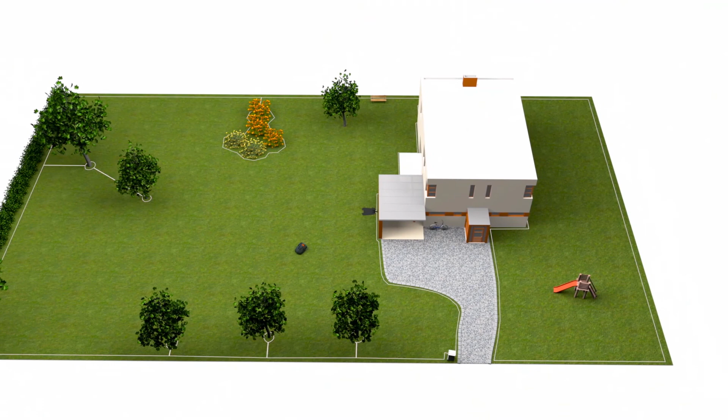Husqvarna Automower works inside an electronic fence created by a loop signal sent from the charging station through the boundary wire. When Automower passes the wire, it detects the signal, stops, turns, and continues in another direction.

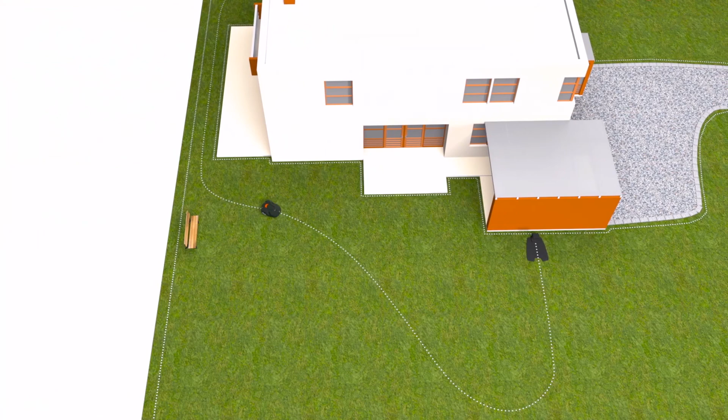Husqvarna Automower works fully automatically. When batteries run low, it has several ways that will ensure it always returns to the charging station. It can follow a radio signal sent from the charging station. It can follow one or several guide wires. And it can also follow the boundary wire back to the charging station. When the battery is fully charged, it returns to work without your intervention.

A robotic mower requires time for installation. However, this is a one-time effort that will give you a more or less maintenance-free lawn for many years. The installation is easy enough to be managed by yourself, but the most convenient way is to let your dealer do the job. They can use a cost-effective cable layer that places the wire a few inches underground and have experience in all kinds of challenges.

Husqvarna Automower works in a free movement pattern. This will let the mower find every challenging corner of the yard. After installing the product, it generally takes a few days of continuous mowing before the lawn looks even.

The robotic mower will now continue to work and constantly cut the grass as it grows, but just a few fractions of an inch at a time. This is by far the most gentle way to cut grass. This concept can even keep moss away.

The clippings from Husqvarna Automower are only fractions of an inch long. They will fall to the soil, decompose, and serve as natural nutrition for your lawn. Since Husqvarna Automower works with razor-sharp cutting blades, the lawn is cut with a fine edge, which also improves the grass quality.

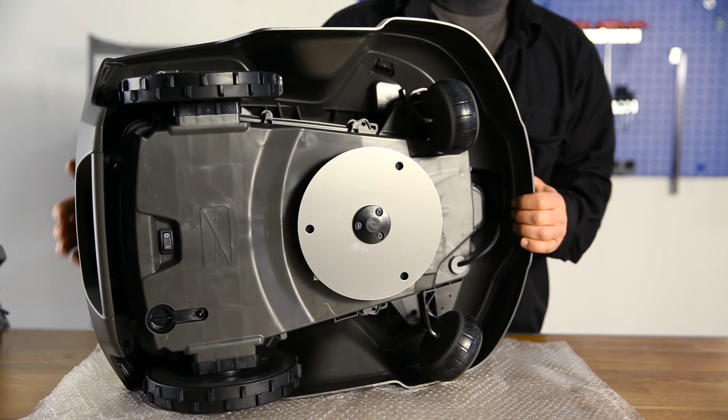There are several differences between the models in the Automower range, but the overall concept is the same. It consists of a 3- or 4-wheel chassis and a body cover. In the rear, there is an integrated handle.

The cutting disc has 3 free-swinging razor-sharp blades. To save energy and protect the cutting blades, there is a skid plate between the grass and the cutting disc.

In the back is the main switch. The mower has a large stop button that also opens the hatch. Under the hatch, you will find a display and keypad for all menu settings.

The method of setting the cutting height can vary between models: manually by turning a knob on some, electrically on some.

There is a charging connector. When the robotic mower docks to a charging station, it starts to recharge.

The charging station has a platform for the mower and a charging tower. The connectors are placed on the rear side of the charging station: left and right for the boundary wire, and connectors for guide wires depending on model. There is also the power supply connector.

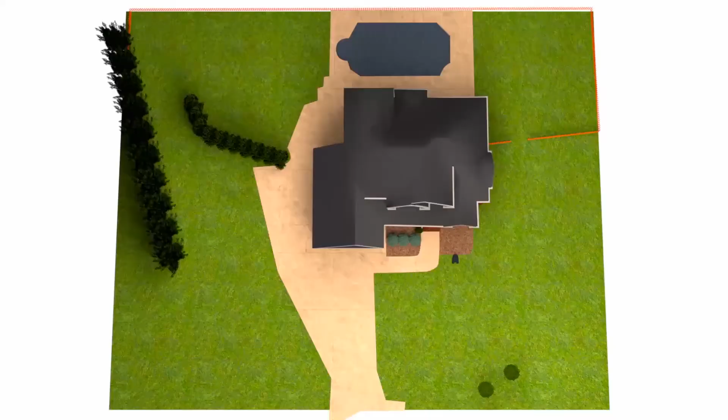Start by making a simple sketch of your yard to get an overview. This will help you plan your boundary and guide wire placement, and placement of the charging station. Some yards need more planning than others. When you have watched this film, you will know the methods to handle the most common objects in your yard.

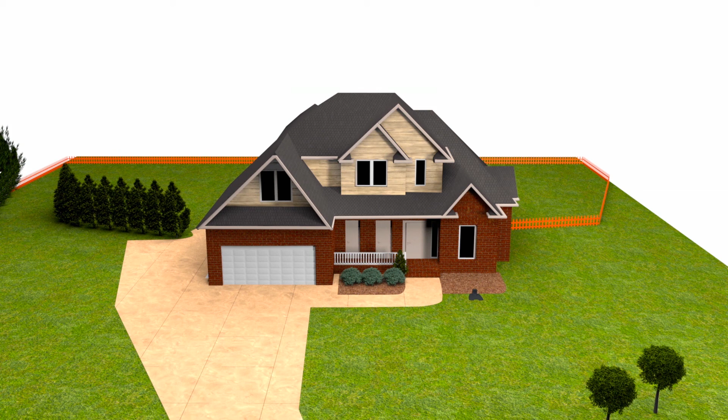Start by placing out the charging station. Recommended placing is on the main area, on an even and preferably shady spot, not far from a power outlet. Find a level spot to make the docking easier for the mower. Plan for 6 feet of free space in front of the charging station.

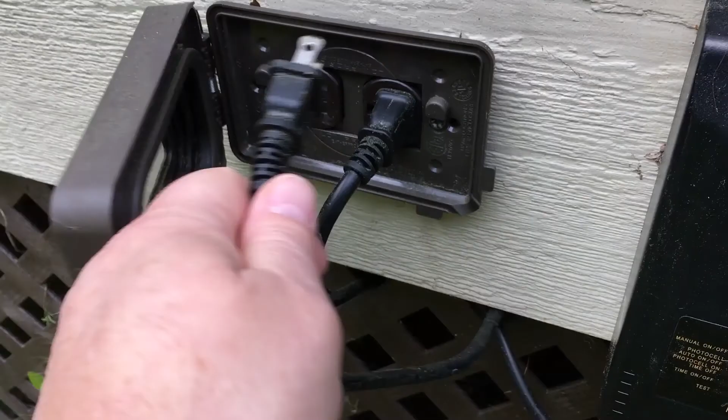Place it on the ground, but do not secure it firmly yet. Find a weather-protected place for the power supply unit. Plug the power supply into the outlet. Connect the low-voltage cable to the charging station.

Switch the mower on and place the mower in the charging station. It will now start to charge and be ready when you finish the installation.

The boundary wire defines the mowing area for the robotic lawnmower. The principle is that the charging station sends a signal through the wire. The mower has a sensor that detects the signal. If it runs over the cable, it stops, turns, and continues in another direction.

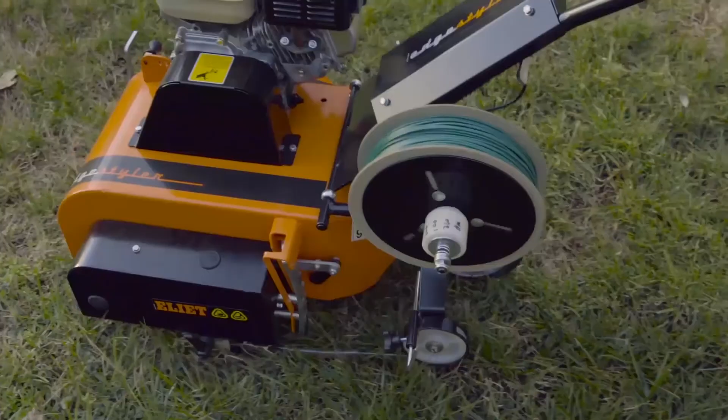If a dealer does the installation, he will probably use a cable layer that places the cable a few inches underground. It is fast and efficient. In this film, we will show the manual way by using a hammer and plastic staples and placing the wire on the lawn. After a few weeks, it will be totally overgrown and not visible.

Regardless, a machine or staples, the distances and principle of laying the wire is identical.

Start by securing one end of the wire at the station. Leave 2 feet of extra wire.

As the robotic lawnmower always passes the wire a few inches before it stops, the wire must be laid at different distances from obstacles. Here the ruler comes in handy. It has 3 printed distances: a short, a mid, and a longer. Exact distances vary a bit between models.

In front of hard objects, like fences and walls, you should use the longest distance. Otherwise, the mower will collide with the hard object at every turn.

When it comes to flower beds and softer bushes, where there is no risk of collision, the mid-distance is sufficient. If the distance is smaller, the mower may drive over the edge and get stuck. If it's longer, the mower will leave uncut grass close to the edge.

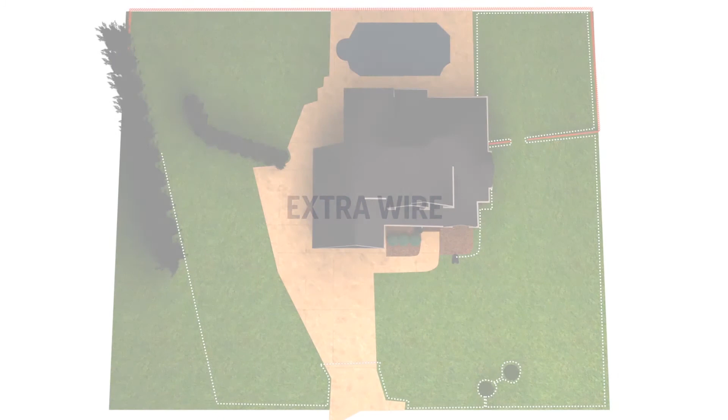Again, our recommendation is to create a sketch of your yard before you start. The guide wire later needs to be connected with the boundary wire. If you have pre-planned this spot, you can leave a 4-inch loop at this location and it will be much easier to do the connection.

When you finish the boundary wire and return to the charging station, leave 2 feet extra wire and cut.

So now you know the basics of how to place the boundary wire. Maybe you will run into obstacles you don't know how to handle, like fenced areas, narrow passages, etc. This will be handled in the chapter Advanced Installation.

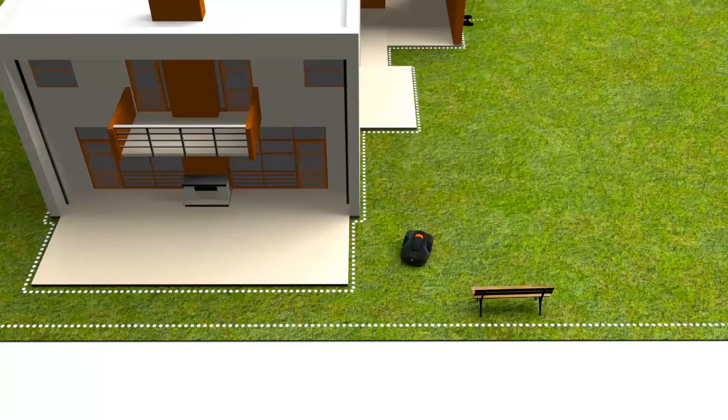But first, you must learn about the guide wire. The guide wire opens a lot of possibilities. It will help the mower find its way to different and more challenging parts of your lawn and return effortlessly to the charging station. Automower does not require a guide wire, as they also can find the station with a radio signal and follow the boundary wire.

But we recommend installing it anyway, as the mower will find the charging station faster. The installation method varies slightly between models. In general, the cable should start from the rear of the charging station, leaving 2 feet of extra wire, placed centered under the base plate.

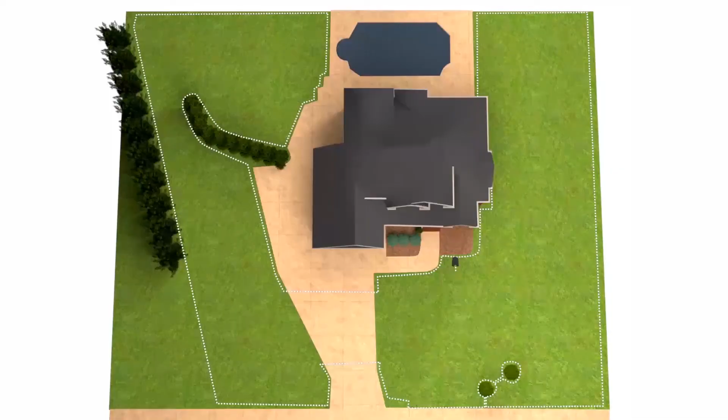In front of the charging station, lay the wire at least 5 feet in a straight line. Use the staples and continue with the wire until you reach the planned spot for connection to the boundary wire.

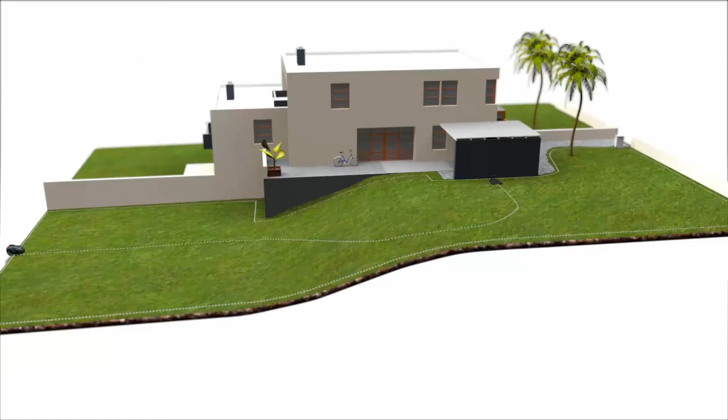In an open yard, lay the guide wire beginning at the charging station and run it to a central point on the opposite side. If you lay the guide wire on a slope, lay the wire diagonally so that the mower will have optimal traction.

If you plan for the connection spot when you place the boundary wire, you'll have extra wire to connect the guide wire with the boundary wire. If not, you may need to extend the wire with another coupler.

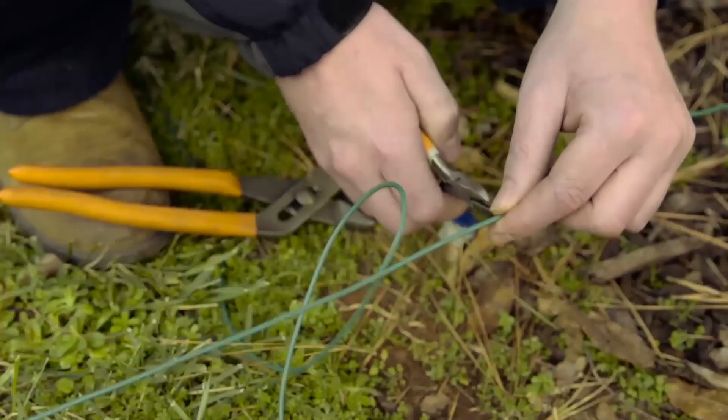Cut the wires. Use a coupler, it has 3 holes. It doesn't matter in which hole you put the wires. Be sure all 3 wires are pushed into the bottom of the coupler. Then squeeze the coupler with pliers.

The plug is filled with grease that makes it weatherproof. Secure everything in the lawn. When connecting the wires like here, or repairing a damaged wire, always use a weatherproof coupler. Just twisting the wires will not withstand corrosion and will lead to hard-to-find faults over time.

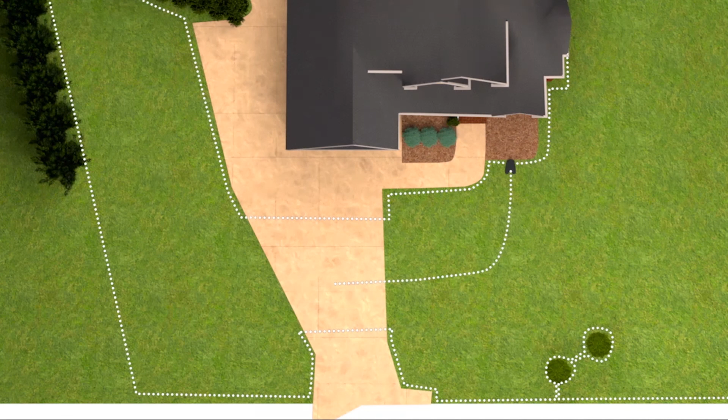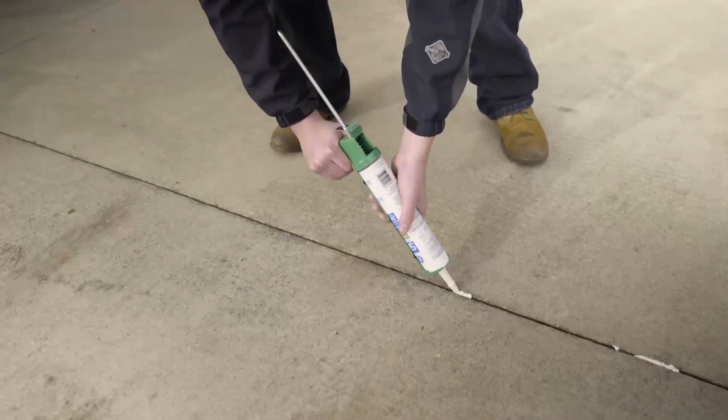If your yard is divided by a paved driveway, you can just let your mower pass by it. If the driveway contains expansion joints, just place the cable there. If not, you can make a thin slit with a grinder intended for the surface you have. Secure the wire with silicone or similar.

In general, we never recommend letting the mower drive on gravel. The risk is high that the mower will get stuck, so a paved passage is recommended instead.

If you have a yard with a remote section, it's a good idea to connect the guide wire here to help the mower find the area and ensure a faster way back to the charging station. If the passage is smaller than 6.5 feet, we strongly recommend doing this. In the passage, the minimum distance between the boundary wires is 2 feet.

As the mower tries to avoid creating tracks in the lawn, it follows the guide wire at various distances. The mower always drives to the left of the guide wire towards the charging station. Therefore, the guide wire should be placed closer to the right boundary wire, seen from this view.

If you have several remote areas, there are Husqvarna Automower models with several guide wires. In this case, there are 2 remote areas: one that can be reached through the passage we just described, and one area behind a fence.

If possible, an option is to make a small hole for the mower in the fence. Lay the boundary wire through the hole and fence off the area in the same way as the main area. Make sure you don't cross the wire.

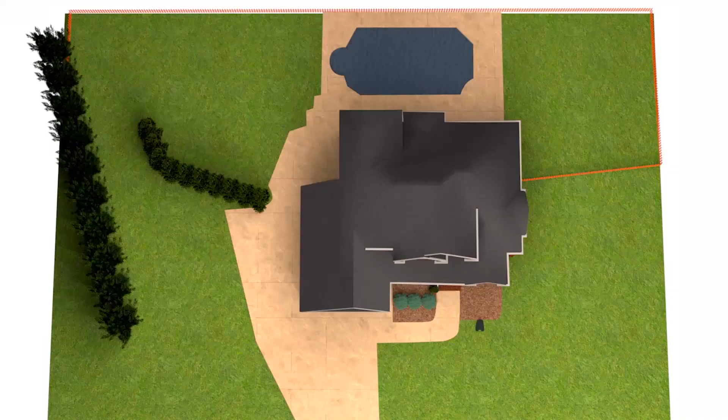If an opening in the fence is not an option, you can carry the lightweight mower back and forth. When placing the boundary wire, choose a suitable spot from the main to the secondary area and fence it in the same way as the main area. Make sure you do not cross the wire.

In this case, you won't need a second guide wire. When you'd like to mow the secondary area, make sure the mower is fully charged and carry it to the area. Press the Start button and select the secondary area option. Otherwise, when the battery runs low, it will start searching for the charging station instead of mowing.

When the battery is empty and the mower stops, bring the mower back to the charging station. Remember to switch back to the main area option when you want the main area mode.

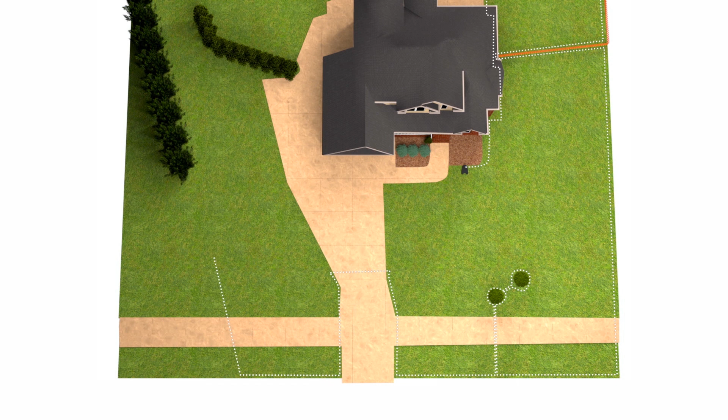If you have sidewalks like this, you can make thin slits and incorporate the sidewalks into the main yard. If it is large enough, you can treat it as a remote area and make a passage with a guide wire. Or make it a secondary area and carry the mower manually.

Now we are almost done with the installation. You just need to connect the wires.

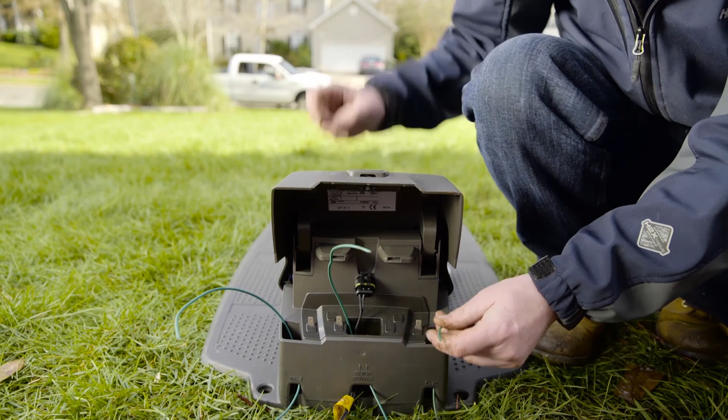Route the cables through the openings. Take a measurement at the contacts on the charging station. Cut off any surplus wire. Stick the wire into the plug.

This is important when connecting: the boundary wire coming from the left-hand side must be connected to the left connection, and vice versa. Finally, connect the guide wires.

Place the charging station on the ground and secure it with the supplied ground screws. Make sure no wires can get in contact with the mower. If installation has been done correctly, the LED light in the charging station will glow steady and the mower can start its work.

Before starting your Husqvarna Automower, remove all foreign objects from the lawn. Open the hatch and follow the startup wizard. If you prefer, you can just let your mower work with the standard factory settings. But we recommend that you make your personal settings according to the circumstances of your yard.

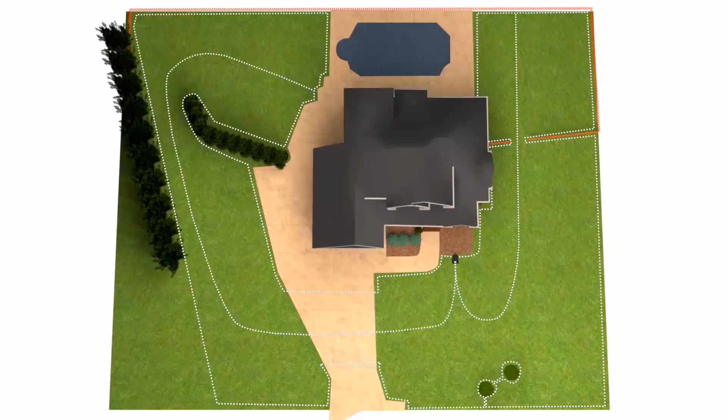A good idea is to set the proportion of mowing time per lawn area if your yard is differentiated.

Maybe you'll find the timer useful. Depending on you and your family's schedules, you can set the exact working time for the mower, like having it working during nights or when you are at work, so you have the yard free when you come home.

There are a lot more interesting settings you can do, so please read the manual for detailed information.

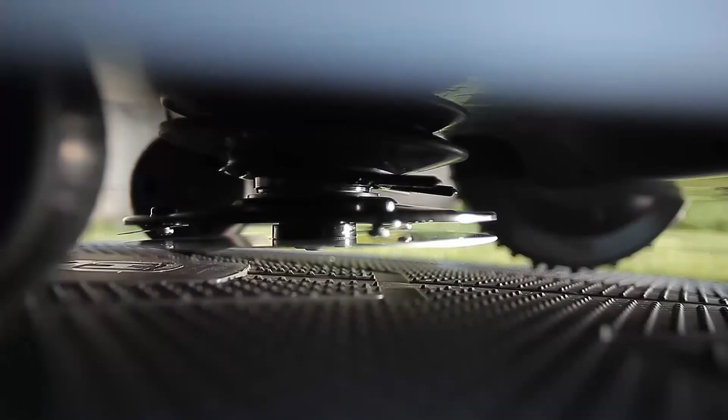From the start, set the cutting height to max. Take some time and observe the robotic lawnmower in action, especially how it keeps the desired distances to obstacles. Most of the time, you will need to fine-tune the wire placing for an optimum result.

When the lawn is completely cut, within days you can start lowering the cutting height until you reach your desired height.

From now on, your lawn will always look perfectly mowed. Your neighbors will most likely ask why it mows an already mowed lawn. The answer is that it maintains the lawn by cutting a few fractions of an inch at a time, not visible to the eye, and with no grass clippings to collect and compost.

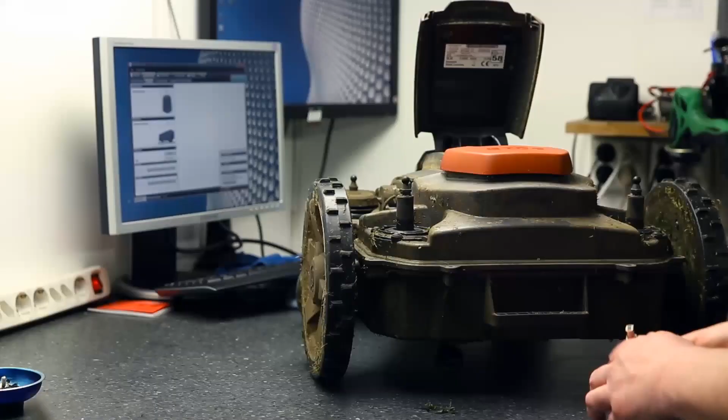Husqvarna Automower is equipped with an advanced anti-theft and security system. An important stage in the anti-theft system is the dealer shop red listing. A stolen mower is useless and therefore not attractive for thieves.

Each mower is equipped with an electronic ID. If reported stolen, it will come up as red listed in the service system at all dealer shops, and no service can be performed.

A PIN code is required for any intervention with the mower. Without entering the code, an alarm will immediately start to sound. It does not work with other charging stations, so stealing a mower makes no sense.

Some models have Automower Connect. The GPS system is a central part, installed from the factory. For some models, it is an option.

In the Automower Connect app, you can track the mower on a map. If it is brought outside its theft protection area, the mower alarm will go off and the mower will keep sending tracking information of its position.

Wear gloves when working with the razor-sharp cutting blades. Place your robotic lawnmower on its back on a soft, clean surface. Make sure the main switch is off.

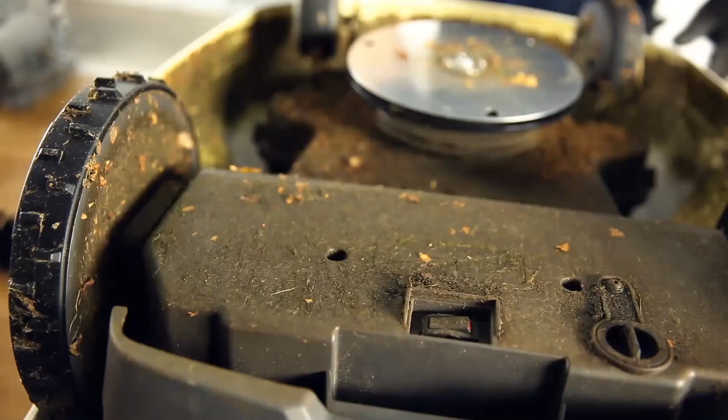Remove all grass you can reach by hand. Use a brush to remove dry grass.

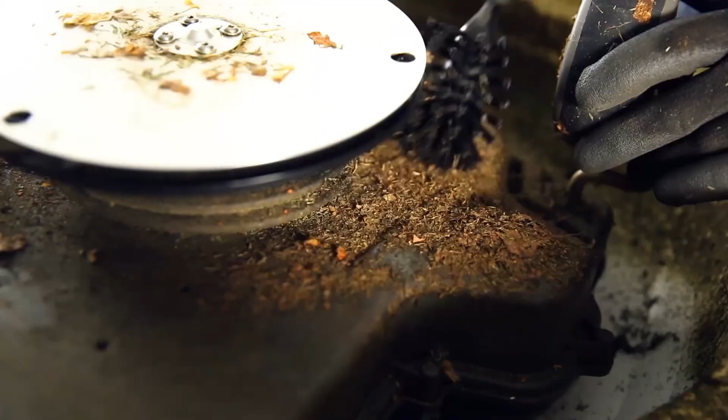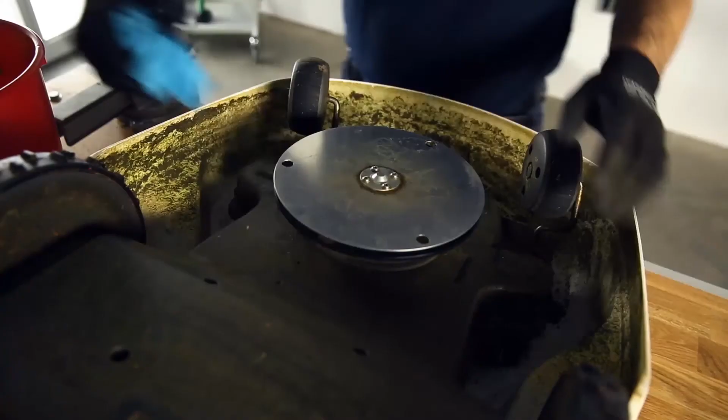Mix a mild soap and water. Use a damp cloth and wipe off the dirty areas. Never use water under pressure when cleaning your Husqvarna Automower.

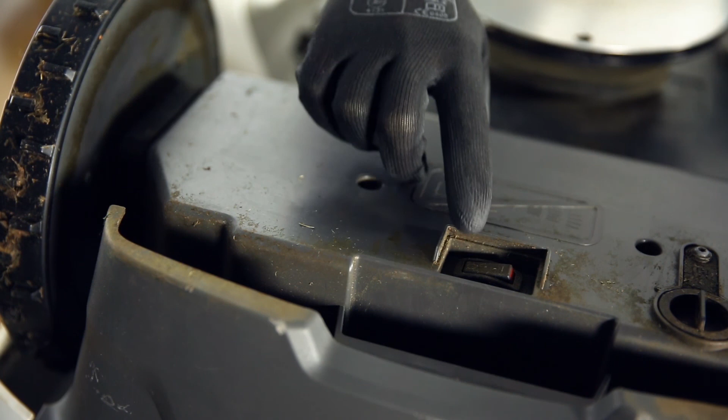Again, wear gloves when working with the razor-sharp cutting blades and make sure the main switch is off. You will need a large Phillips screwdriver for this. Align the hole in the skid plate with a screw. Hold the plate and unscrew the cutting blades.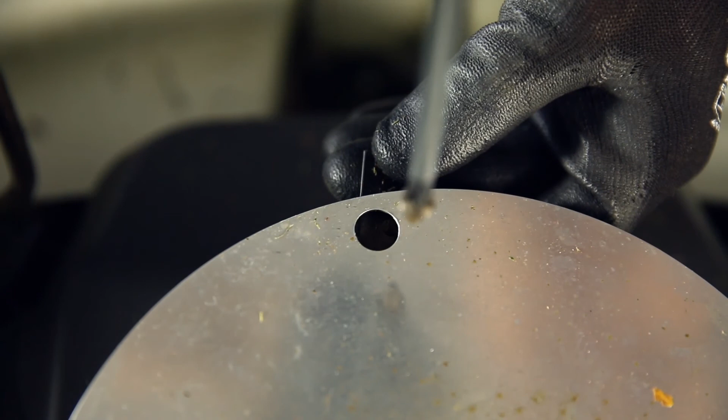Replacement blades come with new screws. Always change them as well.

Clean the area under the blades. Use the new screws and attach the blades.

Check that the blades can move freely.

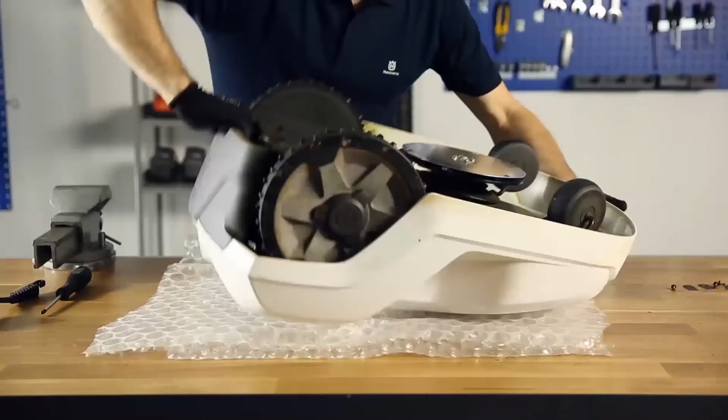Regular cleaning should be complemented with a thorough service once a year.

We recommend that you bring your mower in for a yearly service, and if you prefer, winter service at your Husqvarna dealer.

After service, they will store it with correct battery charge in recommended conditions. We also recommend that you store your charging station protected during winter.

There is a constantly increasing range of adapted accessories for Husqvarna Automower: houses, wall hangers, connective functions, products to make your mower more personal, attachments to handle difficult terrain, and so on. Keep an eye on the Husqvarna website to stay updated.

But for now, enjoy your new housekeeper on duty and your lawn's journey to a premium grade result.